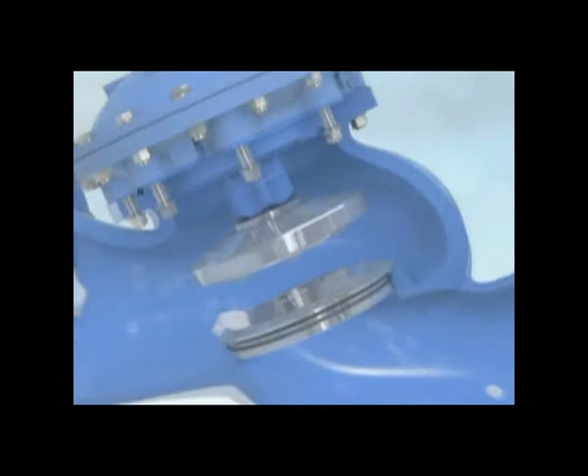Proven over 4 decades in hundreds of buildings worldwide, BERMAD guarantees critical water supply through its unique twofold approach. First, we share our extensive knowledge base from the earliest design stages onwards. Then, we supply a complete range of superior products designed especially for the needs of the building industry.

The results are seen in the final construction and in customer satisfaction. BERMAD Water Control Solutions, a small part of the building, a large part of building success.

BERMAD, ensuring uninterrupted water supply.

BERMAD Water Control Solutions. Founded in 1965, BERMAD knows the value of a single drop of water. With 9 subsidiaries throughout the world and operations in over 80 countries on 6 continents, BERMAD serves customers across diverse fields. Bringing together over 40 years of expertise and know-how, leading-edge technology and precision engineering, BERMAD develops state-of-the-art control valves

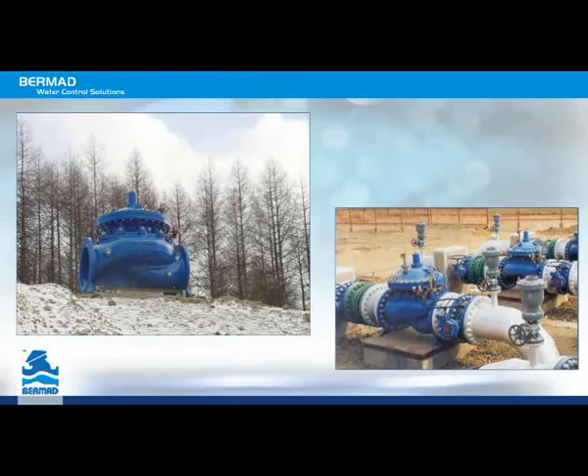and comprehensive system solutions that meet a wide range of water and fluid management needs. Designing for the waterworks sector, BERMAD offers water control systems that manage the supply and treatment of water and wastewater. These systems suit a range of applications, from high-rise buildings to municipalities, and from industrial facilities to hydroelectric power stations. BERMAD, a global leader in managing the world's most precious resource.

At the heart of BERMAD's waterworks activities, covering every water supply and distribution system application, is the BERMAD 700 series line of control valves. Optimally designed and expertly integrated by BERMAD engineers into systems providing just the right models and configurations, the BERMAD 700 series control valves meet every national, regional, and municipal water supply need, as well as the special needs of drinking water supply systems, industrial facilities, high-rise, and public buildings.

The BERMAD 700 series valves are hydrodynamically designed for efficient flow with minimal pressure loss and excellent resistance to cavitation. The BERMAD valves are oblique pattern design using a semi-straight flow path that increases capacity by 25% over ordinary globe valves. The BERMAD 700 series valves allow free flow as they have a port area clear of obstructions, ribs, or stem guides.

The BERMAD valves are designed to operate under difficult conditions while ensuring minimum cavitation damage and noise by incorporating a raised seat and a wide body.

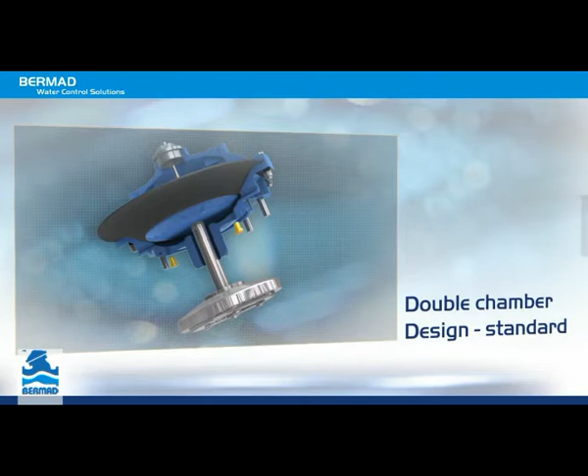The double chamber design is standard, not a costly option. The unitized actuator assembly allows for very short system downtime. The double chamber actuator in the BERMAD 700 series valves is fast closing while smoothly landing on the seat for drip-tight sealing without causing any water hammer.

BERMAD Water Control Solutions. A small part of the solution, a large part of ensuring uninterrupted water supply.

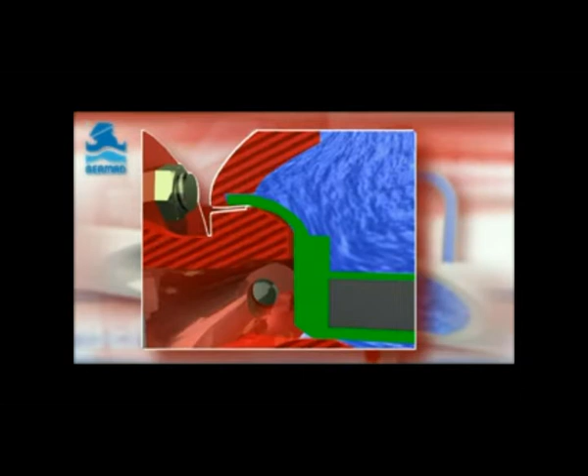Water is an essential resource. Therefore, storage of clean potable water for extended period of time remains a top priority. Constructed from glass fiber reinforced polyester or GRP, Portaglass water tanks fulfill this requirement. Today, Portaglass GRP water tanks supply millions of gallons of clean drinking water to many parts of the world.

Portaglass Tank Sdn Bhd manufactures Portaglass GRP panels, supported by technology from Bridgestone Corporation of Japan, using the technically advanced sheet molding compound or SMC production method. Portaglass GRP panels produced using SMC are dimensionally accurate, uniformly strong and extremely durable under all weather conditions. Portaglass has obtained ISO 9000 status for its quality assurance since year 2000.

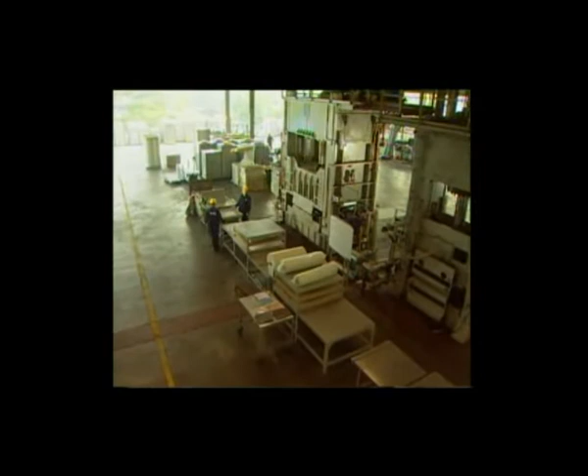Let's look at how these composite glass fiber reinforced polyester panels are made. These are commonly called GRP panels. Three main components make up a GRP panel. They are glass cloth, glass mat, and SMC.

As part of the quality inspection check, incoming raw materials will undergo a visual check for packaging, date of manufacture, shipment, color of material, and general dimensional measurements.

SMC is a reinforced plastic material which primarily consists of a thermosetting resin, chopped glass fiber strands, and fillers. Additional ingredients such as low-profile components, cure initiators, thickeners, process additives, and mold release agents are used to enhance its performance during the processing of the material.

SMC is transformed from its liquid, fiber, and powdered ingredients into a sheet product that is usually about 4 millimeters thick and 1 meter wide. It is usually stored bifolded into a large storage box.

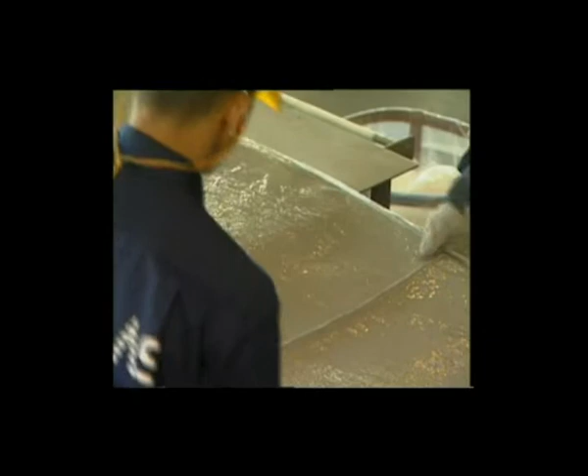SMC is maturated to achieve a tack-free sheet which can be cut to desired size and shape and processed in a mold cavity where it is cured under pressure and temperature. As with any material system, be it metallic or plastic, SMC can be formulated to meet specific performance requirements of a particular application by varying the type and percentage of the ingredients.

When SMC is ready for molding, the material is spread onto a cutting table and cut into pieces of predetermined size and shape. The carrier film is then removed from the SMC.

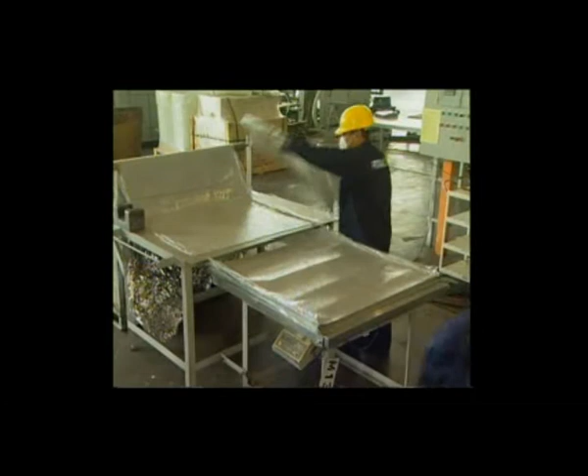Glass cloth and glass mats are cut to predetermined sizes and weighed. The sizes of the material are recorded for quality control purposes.

Glass cloth and glass mat are later molded with SMC to improve the mechanical strength of the GRP panel.

The cut pieces are then stacked together to form a charge pattern. The weight of this charge pattern has been predetermined for optimum shape and volume to fill the mold cavity. The charge pattern is then weighed for verification of correct charge weight and adjusted accordingly by adding or removing material if required. Each charge pattern will be different depending on the type of GRP panels to be produced.

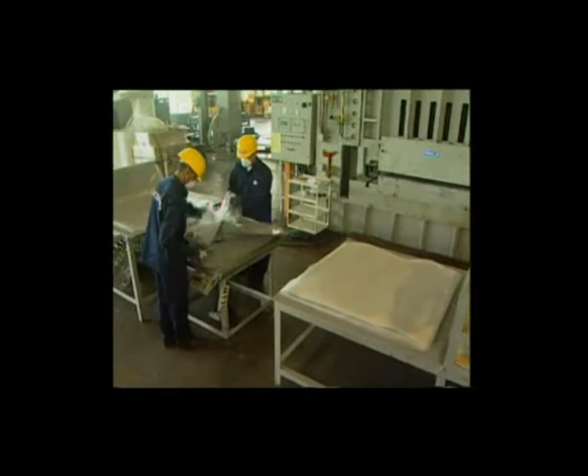Each day, the production supervisor shall review the daily production details on the production notice board and ensure that the correct panel molding specifications are displayed.

If the weight reading is not within the allowed tolerance, red flags will be raised immediately and production will be halted till the matter is resolved. This is part of Potaglas quality control inspection process.

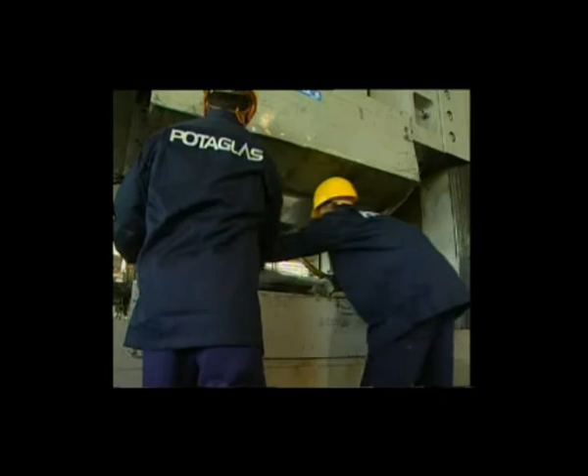The pre-assembled charge is then placed on the heated mold surface in a location that has been determined. Consistent placement is the key to repetitive high-quality panels. The mold setting temperature is also checked and noted.

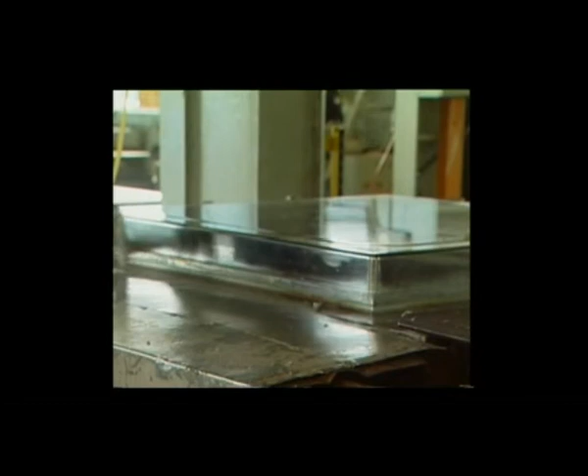The mold is a matched set of steel dies that are plated or surface treated to reduce wear. The mold is oil heated to 140 to 150 degrees Celsius.

After charge placement the mold is closed and the SMC material is compressed under heat. Typical mold pressure for low-profile SMC are around 50 to 100 bar. Thermocouples are positioned around the mold to monitor the mold temperature.

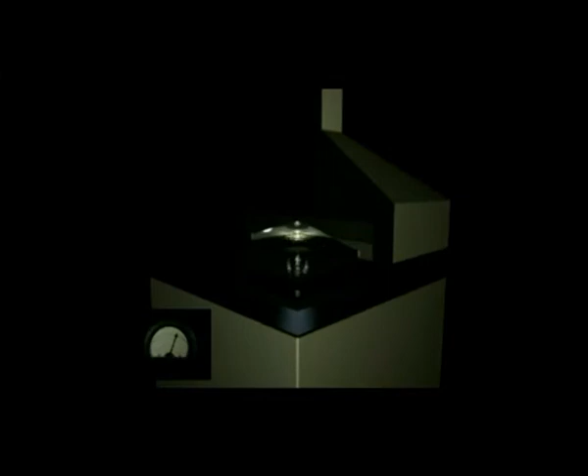The clearance at the mold shear edges allows the escape of air ahead of the material flow front with a minimum amount of material passing through. The application of heat and pressure causes the SMC to initially become more fluid and causes it to flow and fill up all areas of the mold.

After this initial stage, heat from the mold will activate the catalyst for cross-linking reaction to take place. The cure time of SMC varies depending primarily on the size and thickness of the panel and material formulation. This is also termed as curing.

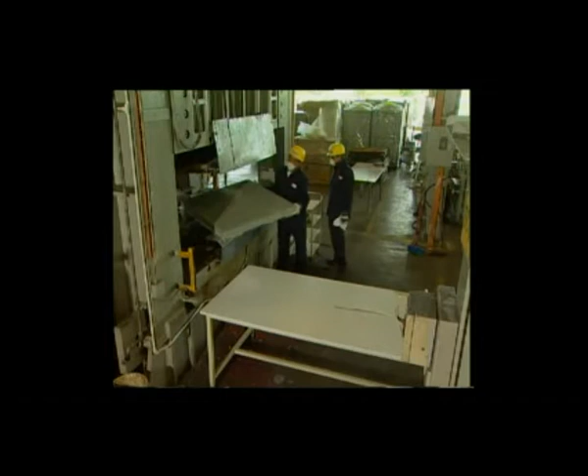After curing, the mold is opened and the GRP panel is ejected from the lower mold surface with the use of integral ejector pin. Hot panels must be handled carefully. The flash is then easily removed with a knife.

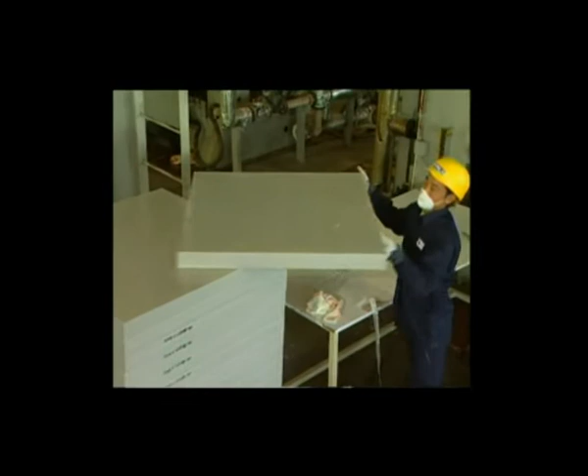The surface of the mold are then cleaned to ensure no excess materials are deposited on the mold.

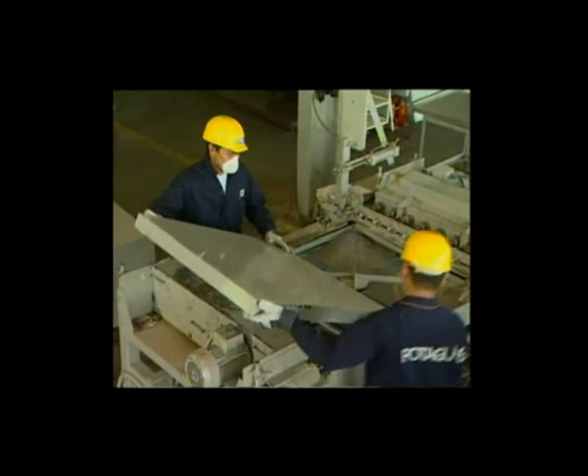The panels are then sent for hole drilling in accordance to the tank configuration as requested by the customers. Each panel will have its own drill code for tank assembly later. Drill codes will then be indicated on each panel. The drill holes are constantly measured and recorded on a regular basis.

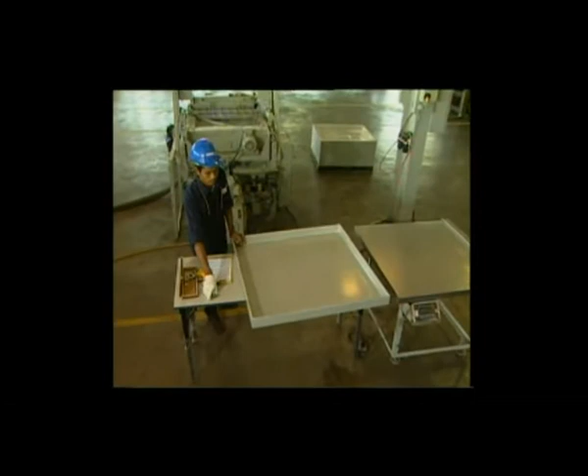As part of the quality inspection, the completed panels are then inspected for any pinholes, rough contour, scars, blisters, repair marks and poor impregnation. Finished panels are also constantly checked for its dimensional accuracy.

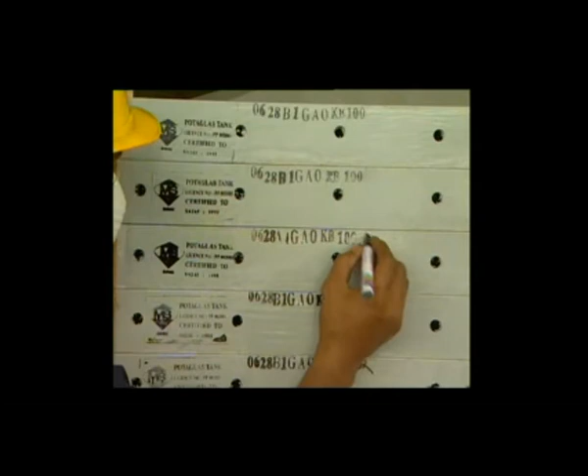Finally, the panels are sent for packing and storage.

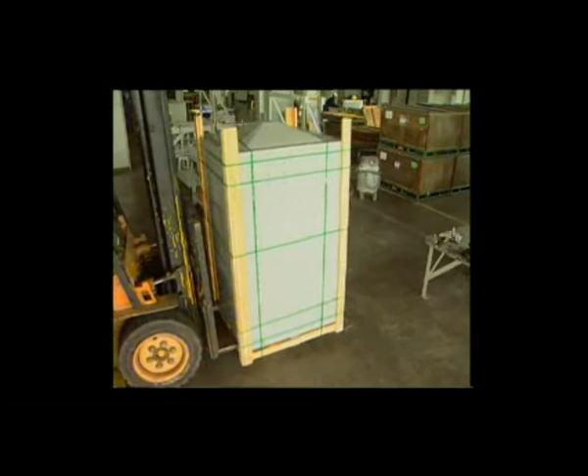The panels will be delivered with the requested accessories.

Potaglass also conducts regular in-house tests such as hydrostatic test, tensile strength test, Barcol hardness, bending strength, elastic modulus in bend, glass content and water absorption tests.

200 series. Plastic hydraulic/electric control valves for residential, commercial, and agricultural irrigation systems.

The Bermad 200 series plastic control valves range from 3/4 of an inch to 2 inches in size and either globe or angle pattern. These control valves provide superior hydraulic performance, constituting, as they do, the state-of-the-art in hydraulics and in plastic technology.

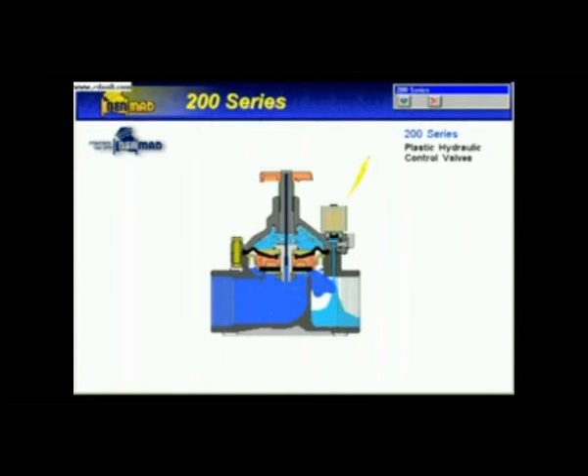Self-cleaning orifice on electric models provides reliable valve operation even with brackish water. Flow control handle for water flow adjustment. Manual solenoid override for opening valves in case of power failure without external water spill. High-performance solenoid with low electrical power consumption. Wide range of models of electric and pressure regulating control valves.

300 series. Metal body hydraulic/electric control valves for agriculture, turf and waterworks.

The Bermad 300 series Y-pattern diaphragm actuated control valves are available in 1.5 inch, 2 inch and 3 inch sizes. This control valve provides high flow capacity with a versatile and accurate double-chambered actuator. The valve can be operated in 3 options: hydraulic or electric on-off remote control valve, pressure reducing or pressure sustaining relief control valve, or a combination of the first 2 options.

Features: Y-pattern body which provides high flow with low head losses. Hydraulically operated by double-chambered diaphragm actuator which provides high versatility of applications and a cushioned no-slam closure. Low sensitivity to dirt. On-off operation as well as throttling operation. Capable of operating at very low pressure with standard diaphragm due to its double-chambered actuator.

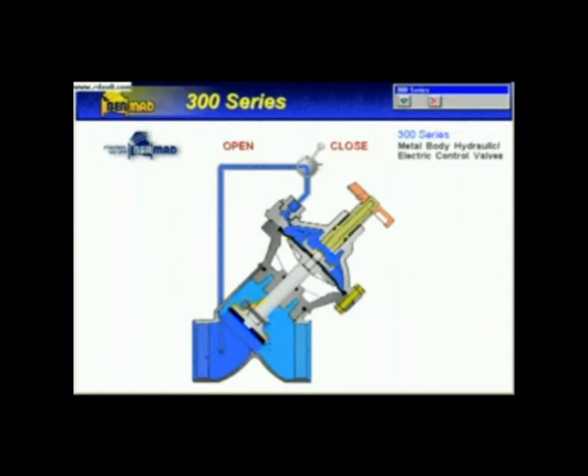Convertible into one of a wide range of pressure regulators: pressure reducing, pressure sustaining, and relief control valves. All pressure regulators are available as combinations of various regulation functions, remote control, etc. Can be installed in any position.

350A series. Filter backwash hydraulic valves for filter systems. The Bermad 350A series patented backwash valve is a compact 3-ported model designed for easy installation and long trouble-free service.

Advanced features include a unique diaphragm-actuated plug assembly, which keeps the supply port closed while opening the backwash port and vice versa. Short travel action guarantees smooth changes of flow direction, conserves water supply, prevents filter site flooding, and eliminates the mixing of supply and wastewater.

At the end of its stroke, the 350A series seals the port drip tight. Incorporating Bermad's time-proven control technology and high-performance standards, 350A series valves have no bearings to service and no intricate rolling diaphragms to replace.

Features: closes supply port before opening backwash port and vice versa. Smooth change of flow direction. No waste of supply water. Drip-tight closure of either the supply or the backwash port. High flow capacity. Can be installed in different positions.

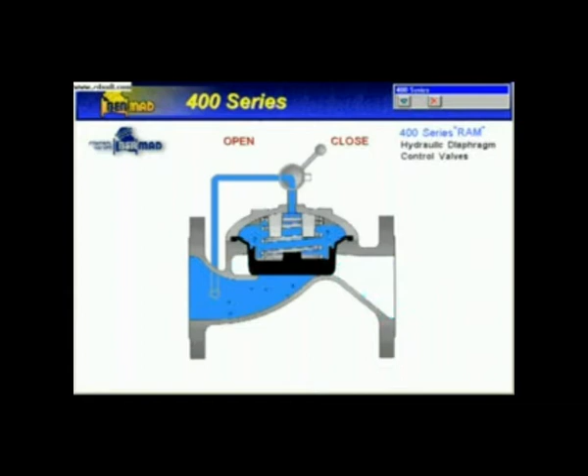400 series RAM, hydraulic diaphragm control valves, internationally patented and design registered. The leading edge in control valve design combines simple and reliable construction with superior performance, while at the same time being virtually free of the typical limitations associated with this type of product. The valves have been designed for the control of all kinds of irrigation, waterworks, and industrial systems.

Features: diaphragm, one single type for all service conditions, on-off and pressure regulating. Exceptionally stable action during shutoff and pressure regulation. Absolutely no pressure surges. Valve opens with low pressure supply.

Perfectly balanced diaphragm with no distortion caused by uneven hydraulic forces on shutoff or during regulation. No need for special reinforcement, nor for different types of diaphragms and springs to meet different operating conditions.

Valve body: exceptionally high flow capacity with very low head loss. Cover: connected to the valve body by 4 bolts only, enabling easy access and easy maintenance. Optional.

R-Series RAM hydrant, 3-inch hydraulic control valves for agriculture, turf, and filtration control systems. The Bermad R-Series 3-inch RAM hydrant control valves are hydraulically operated diaphragm valves, designed for reliable control of irrigation hydrants and characterized by simplicity, durability, and dependability.

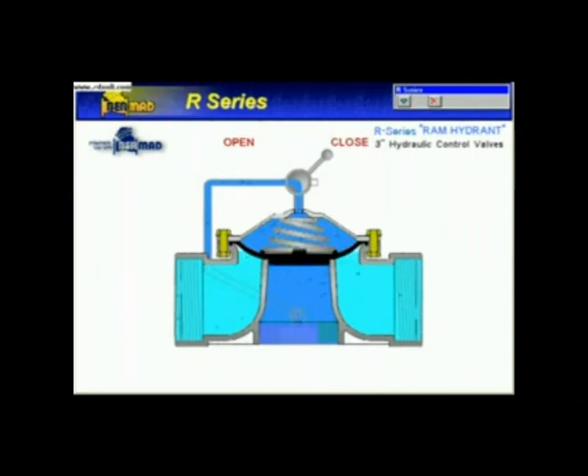700 series hydraulic diaphragm control valves for automatic control of water supply systems.

The Bermad 700 series hydraulic control valves provide superior performance in the control and regulating of pressure, flow, water level, pumping systems, and additional applications in waterworks and industrial systems, as well as in supply networks for irrigation systems.

The Bermad 700 series consists of valves for a wide range of applications and constitutes an impressively complete product line. Its unsurpassed reliability has been well proven over many years of use throughout the world.

The Bermad 700 series is complemented by a comprehensive range of control pilot valves and other control accessories for total application flexibility. The Bermad 700 series control valves are available in sizes ranging from 2 inches to 20 inches, 50 to 500 millimeters, and for working pressures up to 35 kilograms per square centimeter, 500 psi. Pressure ratings and connections are in accordance with ISO, ANSI, BS, and JIS standards.

Features: Y or angle pattern wide body, hydrodynamically designed for high flow capacity and low pressure loss. Double-chambered actuator provides positive immediate response with accurate control, as well as smooth valve action without causing water hammer.

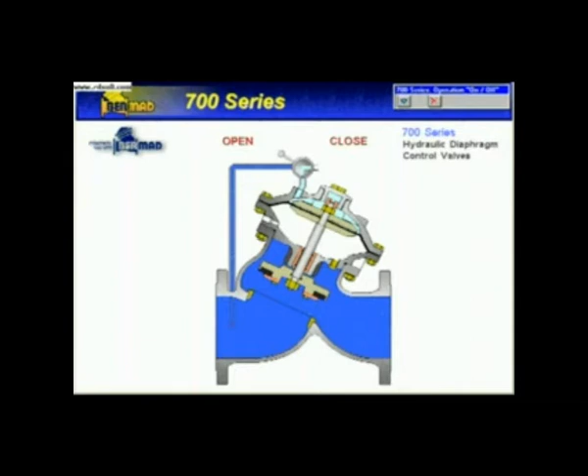Optional V-port plug provides superior control flexibility, from full flow to zero flow, under varying pressure conditions. Industrial quality construction meets international standards for material quality assurance and hydraulic control valve performance.

Introduction. The model 700/705 basic hydraulic valve is a hydraulically operated diaphragm-actuated globe valve in either the oblique, Y, or angle pattern design. The valve is comprised of two major components: the body seat assembly and the actuator assembly.

Semi-straight low restriction flow path increases capacity 25% over ordinary globe valves.

Double chamber actuator provides positive immediate response with accurate control, plus smooth drip-tight closing without causing water hammer.

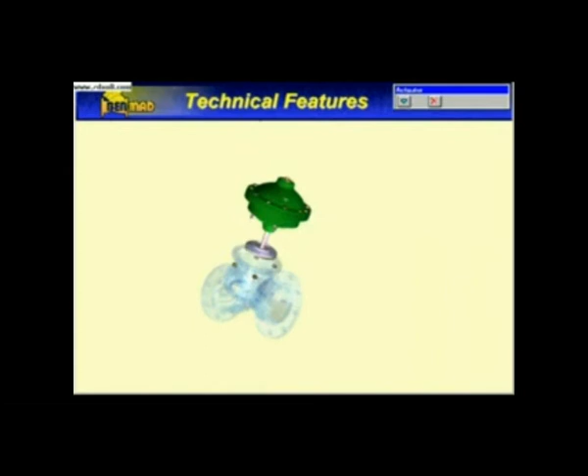The entire actuator assembly, including the diaphragm, can be easily removed from the valve body as one complete unit, providing ease of inspection and maintenance. The double chamber design is standard, not a costly option.

Dynamically engineered center-guided shaft provides optimum support throughout the flow and pressure ranges, eliminates bearing misalignment problems and flow restrictions.

Unitized actuator assembly is easily removed for seat and seal inspection, eliminating the need to tear down and reassemble the diaphragm.

Y or angle pattern wide body. Hydrodynamically designed for efficient flow with minimal pressure loss and excellent resistance to cavitation. Full bore valve port area clear of obstructions, no ribs or stem guides.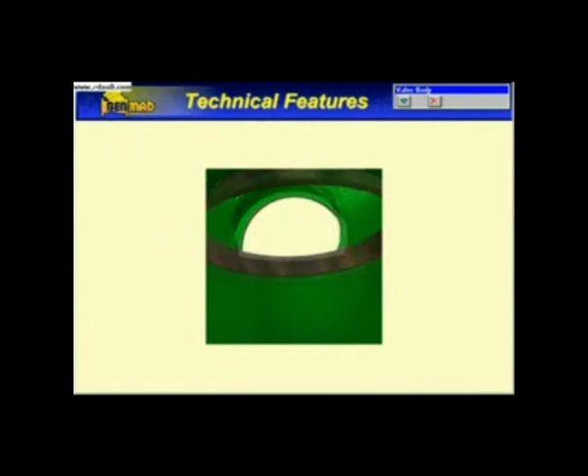Rugged industrial quality construction materials. Meets ASTM, ISO, BS, JIS, ANSI, AWWA, UL, FM standards requirements for hydraulic control valves.

Valve seat assures easy removal and cost-effective servicing.

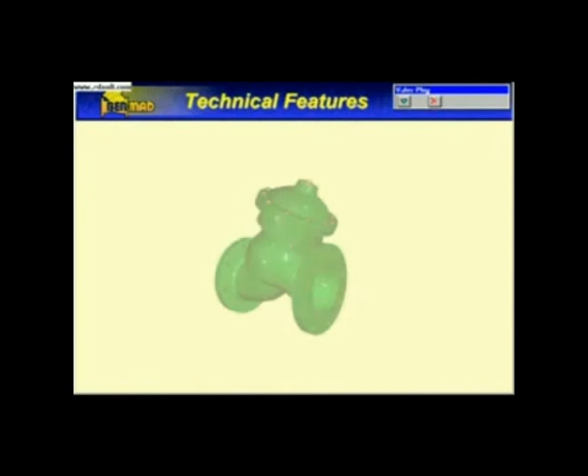End connections, threaded or flanged, conform to pressure ratings and standards of ISO, BS, DIN, JIS, ANSI, NPT, BSP. Self-aligning valve plug seal disc assembly provides free movement and a resilient seal for perfect drip-tight sealing.

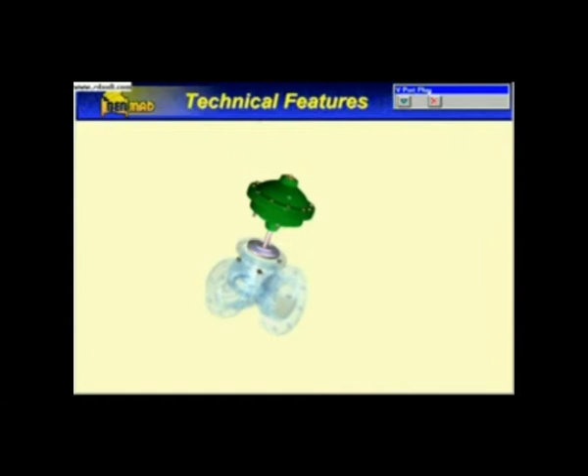V-port throttling plug. An easily added option for low flow and high differential pressure regulation. What is it? The V-port plug mounts under the standard flat seal disc.

It is self-aligning with a close tolerance fit to the valve seat. What does it do? The V-port plug changes the ratio of flow to stem travel. It makes the stem travel longer than the flat disc for the same flow.

So what? It provides more accurate, stable, and smooth response for flow and pressure regulation while reducing noise and vibration. It allows a very wide flow range with relatively high pressure reduction. It may save the installation of a secondary smaller bypass valve needed for low flow.

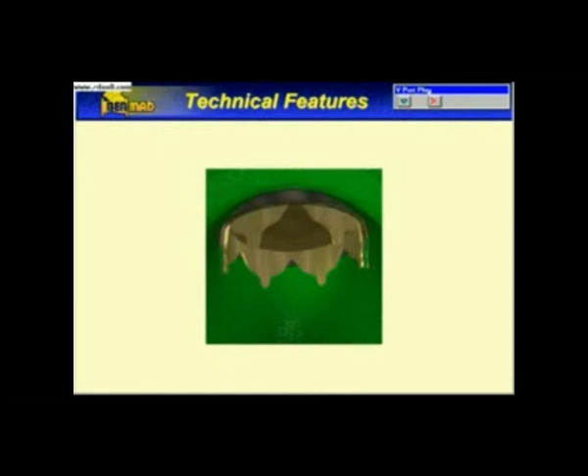Where is it used? Pressure reducing applications with high pressure reduction and/or low flows. Pressure relief applications venting to atmosphere. Deep well pump control. Modulating float valves.

Where not to use? Where minimal pressure loss is required, as with electric remote control or booster type pump control valves. Where supply pressure tends to equal downstream pressure set point on pressure reducing valves.

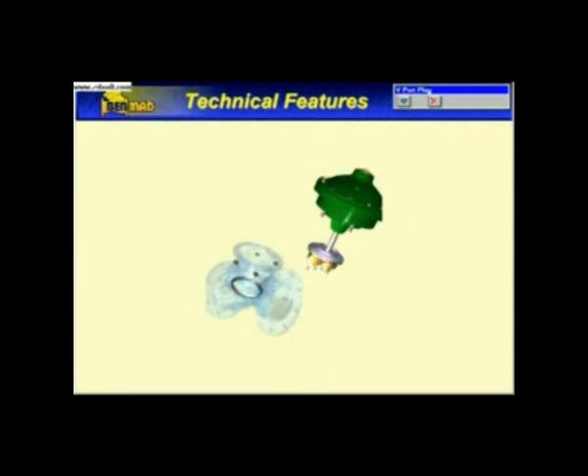How is it installed? By simply exchanging the standard flat seal disc washer with the V-port plug using the same set of screws.

Valve position indicator for visual valve opening indication. Electric limit switches for valve operation in conjunction with pumps.

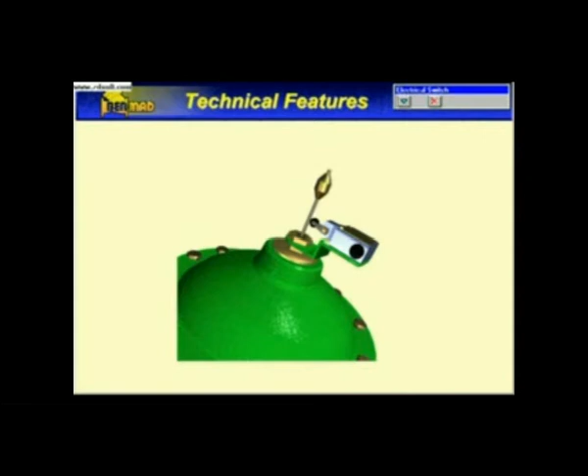Valve Position Transmitter, PCU, for smart valve computer controlled valve.

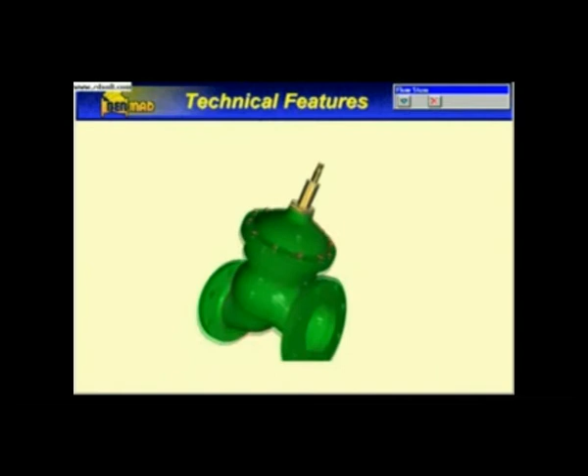Flow stem limits the valve opening, providing flow control. Lift spring for normally open main valve or assist valve opening on very low supply pressure.

Model 73Q, pressure relief valve, quick action type. Essential for the protection of water supply, irrigation systems, and pumping stations.

This innovative hydraulic pressure relief valve was developed to solve the typical problems associated with spring-load type relief valves, in which constant drifting of the relief adjustments occurs, leading to continuous leaking and excessively high pressure settings, thus defeating the very purpose of the valve as a relief valve.

The Bermad Model 73Q pressure relief valve offers accurate relief pressure settings that remain unchanged, opening to full capacity upon minimum pressure rise in the pipeline, with regulated closing speed providing smooth closure without pressure surges.

Features: simple, sturdy construction for operating under adverse working conditions. Immediate, reliable response. High pressure relief capacity. Drip-tight sealing, no leaks. Steady opening force, regardless of valve stroke.

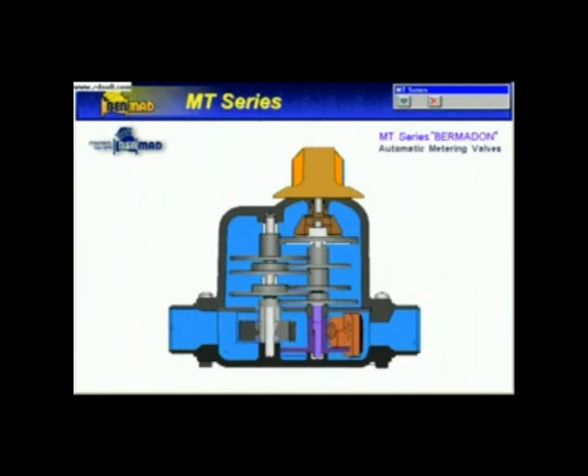PRV series, direct acting pressure reducing valves for irrigation, residential and industrial applications. The Bermad PRV series direct acting pressure regulators have been specially designed for use where accurate and reliable control of line pressure is required, regardless of fluctuations in supply pressure and/or flow rate.

Features: the use of a rolling diaphragm provides complete separation of the mechanism from the flow, resulting in long trouble-free service. Minimum friction resistance to mechanism movement, resulting in accurate performance.

PRV regulators are available with a wide range of spring selection for downstream pressure setting, in 2 models—adjustable and fixed downstream preset pressure—and are also available in drip-type models for static pressure conditions.

AR series, air and vacuum release valves for waterworks, irrigation and turf systems. The Bermad AR series air and vacuum release valves include 3 basic models.

1-inch automatic pressure air release valve, model 01-AR-A, for the automatic release of entrapped air pockets from pressurized systems. 2-inch kinetic air and vacuum release valve, model 02-AR-K, with large orifice for the release of large quantities of air from filling pipelines and for admitting air into quick draining pipelines to prevent vacuum damage.

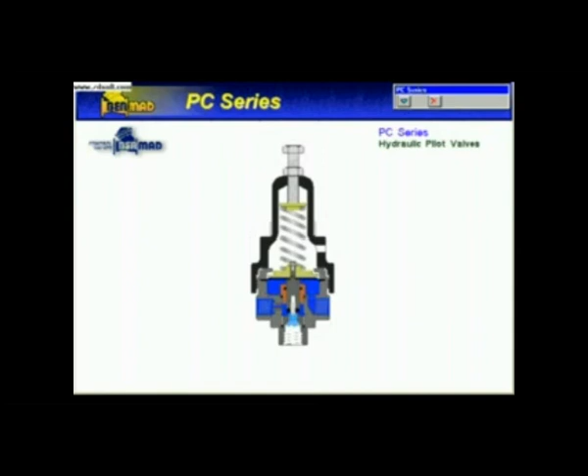S-Series solenoid pilot valves. The Bermad S-Series solenoid pilot valves have been specially designed for reliable operation in irrigation systems. They are widely used in conjunction with hydraulic control valves such as the Bermad 200, 300, 400, and 900 series.

Solenoid S390 with D appendix has the following outstanding advantages: low sensitivity to dirt and voltage fluctuation, low operating temperature. Saves on the cost of cables by reducing the required cross-section. Three-way solenoid comes with the AC adapter. In two-way solenoid, the AC adapter is optional.

Solenoid actuators. S-390-2, two-way, and S-390-3, three-way, directly mounted on the hydraulic valve bonnet.

Solenoid pilot valves. S-390-2B, two-way, and S-390-3B, three-way, consisting of the above solenoid actuators mounted on pilot valve bodies with manual override. These solenoid pilot valves are designed for installation in the control loop of hydraulic control valves.

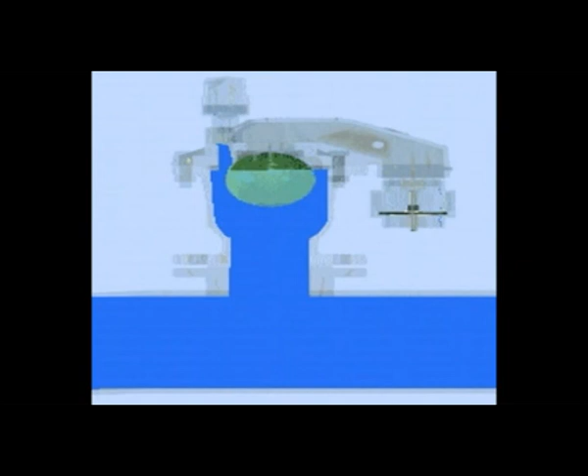UFR, the solution for measuring undetected leakage.

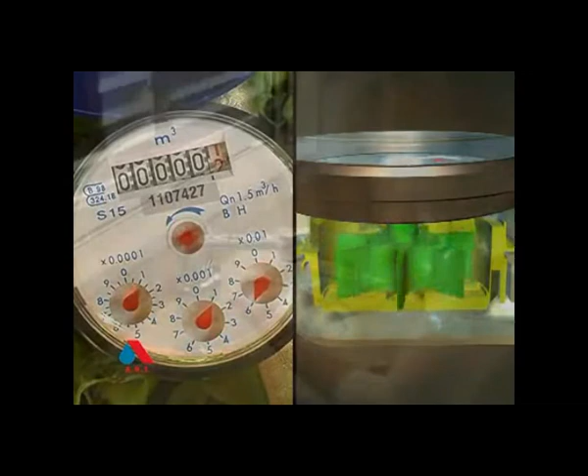All water meters can measure water flow. But when it comes to slow leaks in the faucet, they're simply not efficient. A faucet dripping at 4 liters, about 1 gallon per hour, won't show up on the water meter, as though there was no water flow at all.

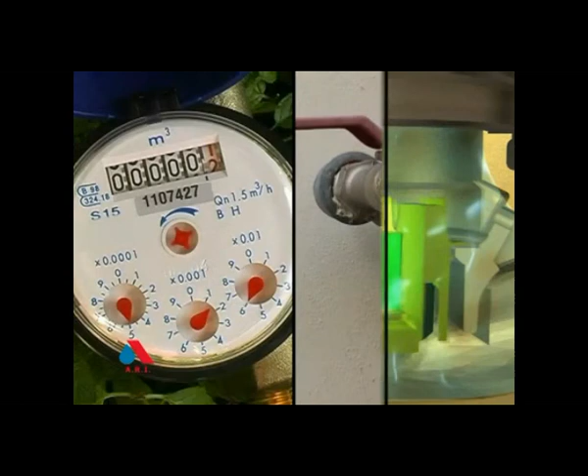Even brand new water meters can't measure very low flow rates. Over time, friction and accumulated lime and debris further reduce their sensitivity and performance. Meters can't measure leaks like this. The flow is simply too slow to activate the measuring device. Continuing 24 hours a day, 7 days a week, such leakage can account for more than 20% of household water consumption and averages about 10%.

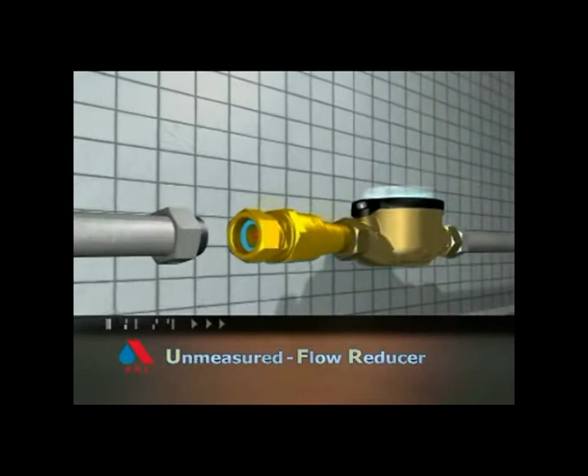The revolutionary UFR unmeasured flow reducer from ARI Flow Control Accessories can solve this problem. Operating as an add-on to existing water distribution systems, the UFR can be installed before or after the water meter, enabling it to read low flow leakage. UFR does so by batching the water, enabling water to flow only at a rate that can activate the measuring device.

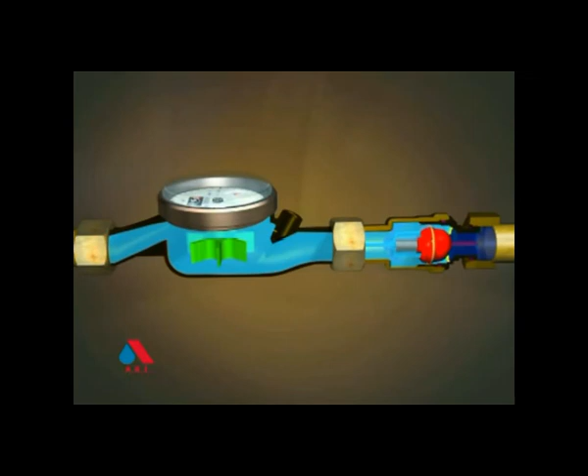How does the UFR work? When pressure on both sides of the UFR is equal, the spring pushes the plunger to the closed position. Leakage causes the downstream pressure to decrease. The plunger moves forward, pulling the rubber seal with it. The rubber seal disengages instantaneously, and the water batch moves quickly forward, activating the water meter.

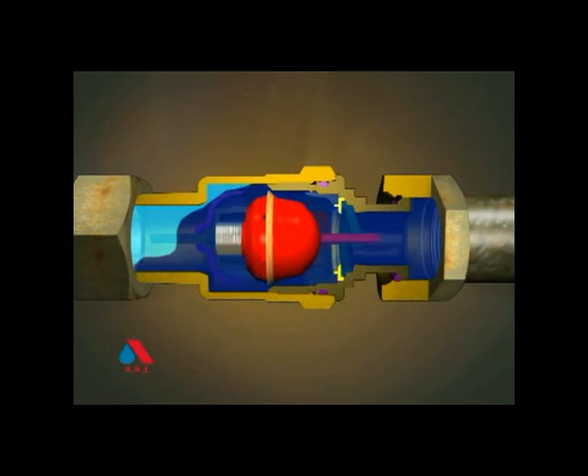At normal flow rates, the UFR remains fully open with very low head loss. This is how the UFR helps measure low flows that were never measured before. The UFR from ARI, reliable and maintenance-free. The UFR, another breakthrough in water metering from ARI.